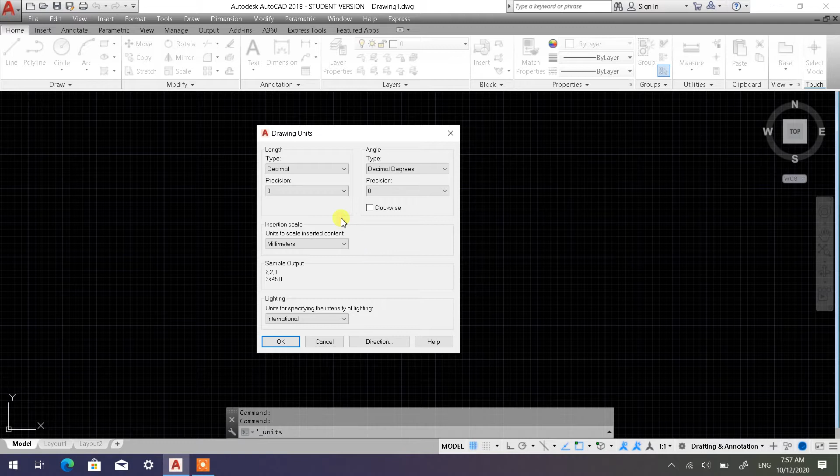Then I will pick AutoCAD ISO, as usual, AutoCAD ISO for metric units. Before I proceed, I need to check my units definitely. I'm going to make sure this is decimal... I'm going to pick without decimals, and everything should be okay. Then just click OK.

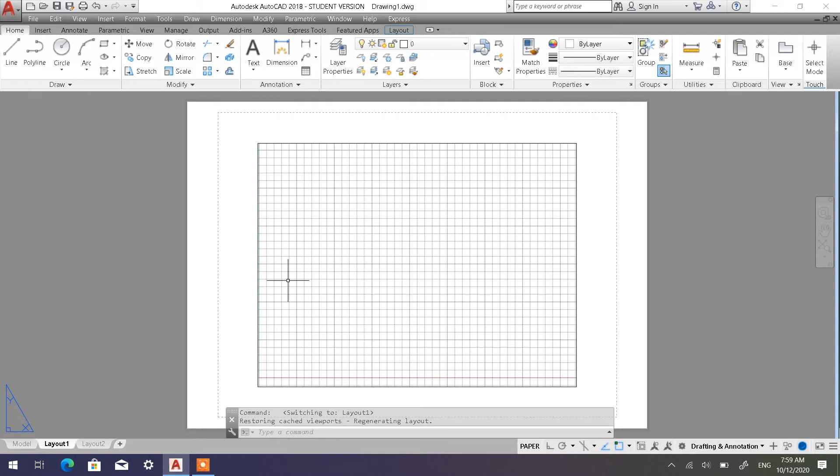So when you pick layout 1, it will form like this. So let's delete this first, just click this one and delete. Then we have to set up our layout for the title block.

What you need to do is bring your cursor to layout 1, right click, then go to page setup manager. You have to make sure you pick layout 1, not layout 2, because we want to set it on layout 1.

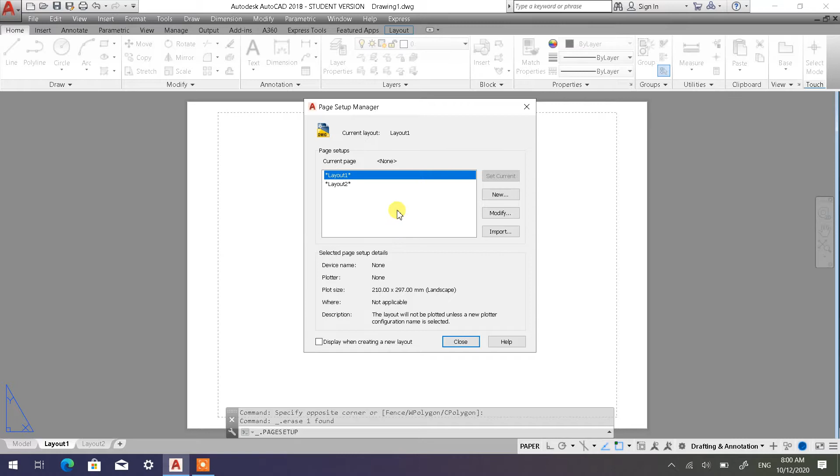So go to layout, since we already chose layout earlier. If you pick layout 2, you choose layout 2 instead. But in my case, as I mentioned, I picked layout 1, so I'm going to use my layout 1 to edit and manage the layout. Once you've picked layout 1, you go to modify.

If you look at the printer plotter section, if you expand this arrow, you can pick whichever type of printer you use. But let's say you don't have a printer, you can just simply go to DWG to PDF, drawing to PDF.pc3. You can choose this one.

In my case, I have two types of printers, HP DeskJet and also Fuji Xerox, so I can choose either one. But in this case, I want to show you, if I don't have a printer, for example, I can just simply pick DWG to PDF.pc3.

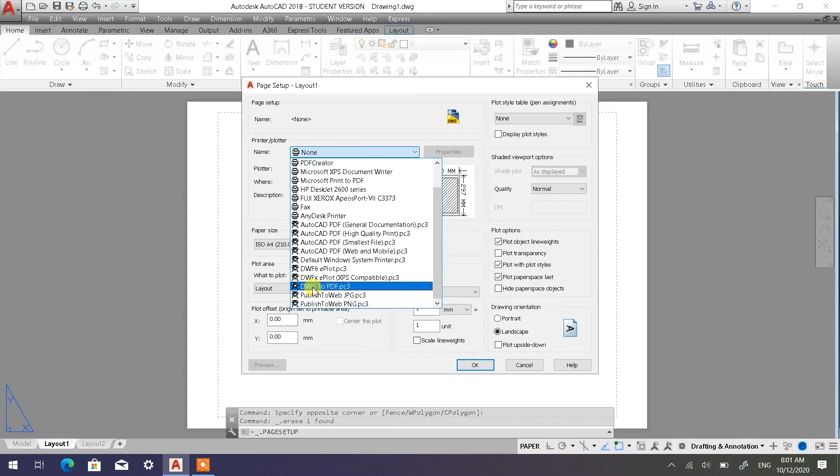Just click this one, and then you have to make sure you pick ISO. Not expand, not expand A4, but ISO A4. You can scroll this one.

ISO A4. This one, 210 times 297, this is for landscape. If you want to create portrait, you pick this one, 297 times 210. So let's say I'm going to create my landscape A4 landscape title block.

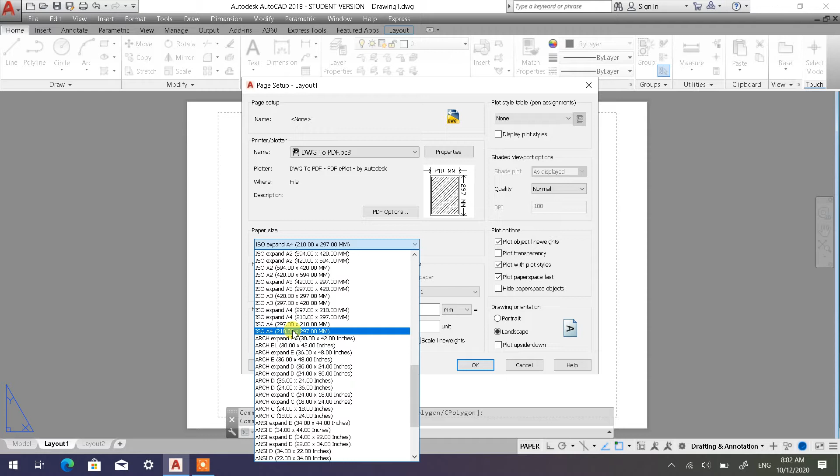So I'm going to pick, remember don't pick ISO expand. You need to pick ISO A4, 210 times 297. Just click this one. Then make sure all this, leave it as default. Layout, this one, scale 1 to 1.

And plot style table, I want to expand this and choose monochrome. Choosing monochrome means it will be black and white. If you want it to be colorful, you can go to AutoCAD.ctb or fill patterns. But since I want to make it black and white, I just pick monochrome.

And one more thing, before we exit from this page setup layout 1, I want you to go to the properties. Go to the properties button over here. Click this properties.

Under user defined paper sizes and calibration, choose modify. Pick this one, pick this one. Modify standard paper sizes, okay, click this one.

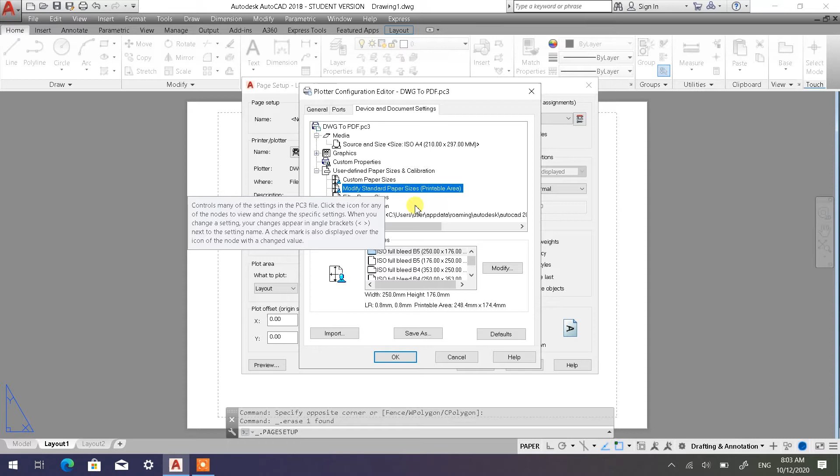After you click this one, go here, modify button. Click modify button and make sure all these you pick 5. Why? What is this 5 for? Top, bottom, left, right. Okay, later I will explain what all this means. Okay, 5mm for top, 5mm for bottom, left and right also we're going to set as 5mm.

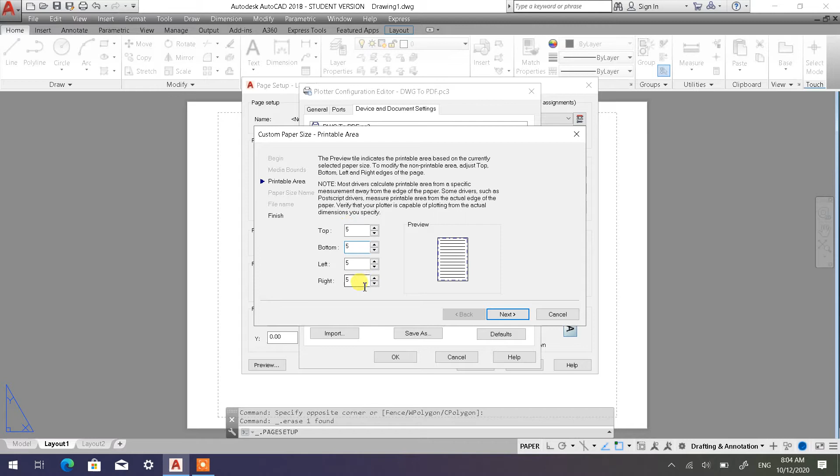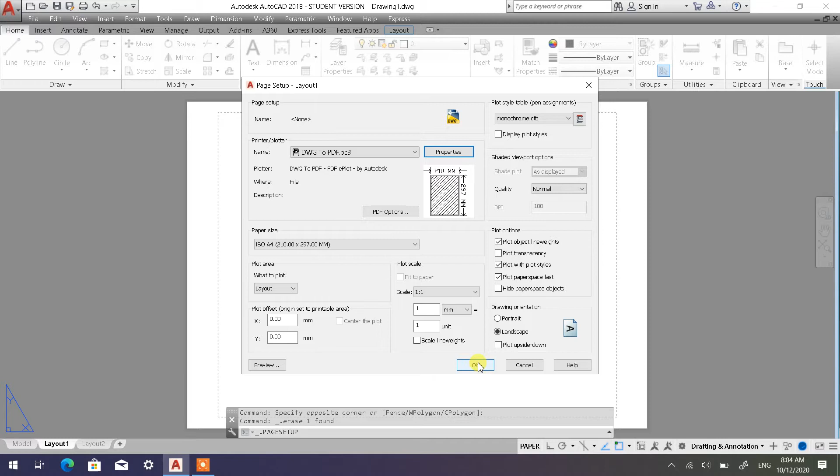Once you've changed all these or already set this value to 5mm, just go to next, and then next. If there's still next, then just finish it. Okay, just finish it. After you've set all this, just go to OK, and click OK. Okay, to exit from this page setup, click OK.

Then close. Now, the 5mm top, 5mm bottom, right and left that we set just now is from here. If you look at this dotted line, the outer one is actually the A4 size landscape. Okay, A4 landscape is 210. This one is 297, the length. Alright, the length is 297, the width is 210.

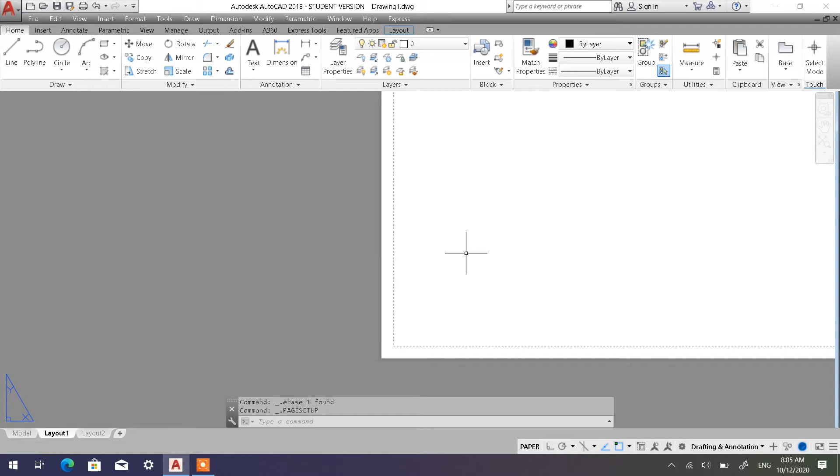Meanwhile this dotted line is our printable area. Okay, the area for us to print later. And the 5mm distance just now is from this dotted line to the edge of this A4 paper. So from here to here is 5mm, from here to here is 5mm. Okay, at the bottom, if I enlarge it, from here to here is 5mm, same as this one, from here to here is 5mm. Okay, I set it to 5mm.

You can set it to 10mm too, but if it's 10mm, the printable area becomes smaller. So that's why I just make it 5mm.

The reason I set it to 5mm is because I've tried 3mm before, and with my printer, the title block outer line doesn't print out. If I set it to 3mm or 4mm instead of 5mm, that outer line for the title block, which we'll draw later, doesn't print. So it comes out blank. That's why after trial and error I found that 5mm is the best for all the edges, top, bottom, right and left.

Okay, my printer can handle this. So it depends on the printer as well. If your printer, you try setting 5 first, then try 4. If 4 works too, okay, you can try to take the maximum possible for the A4 printable area.

Okay, now once we've created this, we want to draw the title block lines. So I want to create one layer. I don't want to use this default layer. You can use the default layer, but I don't want to. So I go to layer properties.

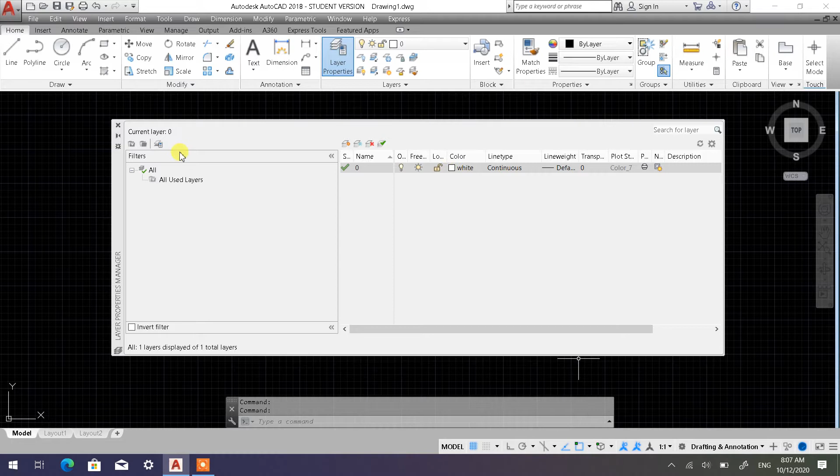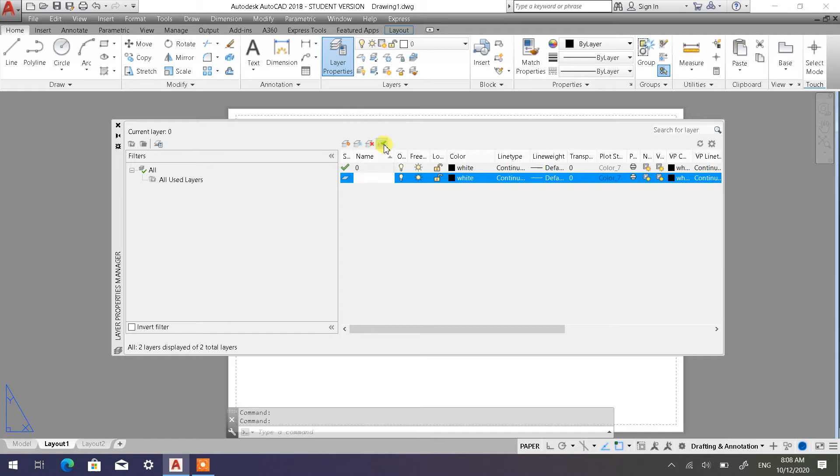Okay, so I'm going to create my layer properties. I'm going to create new, and rename it as TB. TB means title block. You can put any name, doesn't matter, no problem. I'm going to make it TB title block, which stands for title block, color white, line type continuous. I'm going to maintain all this. And then I'm going to make this one current. Alright, that's it.

Now I want you to go to rectangle, pick rectangle, and it asks specify first corner point. So bring your cursor, don't click exactly on top of this line, let it be slightly inside. Okay, let it be slightly inside, not too far in. Just estimate, okay, just estimate, then click, then bring your cursor, it asks specify other corner point.

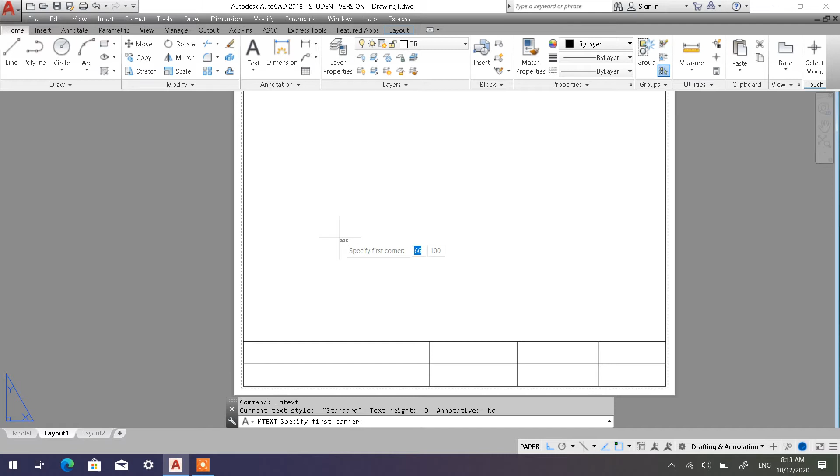I already showed you how to apply single line as well as multi-line text, but I much more prefer to use multi-line text. So go to multi-line text, then just click anywhere here, never mind, because later on we can modify it, so no need to worry. Click here, and then the second point is around here.

And then I'm going to type, don't worry about the size of the font, Faculty of Mechanical Engineering, enter, Universiti Teknikal Malaysia Melaka.

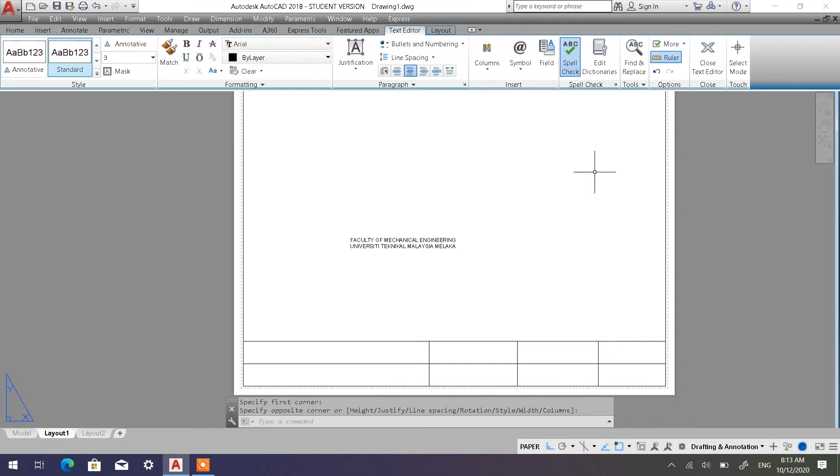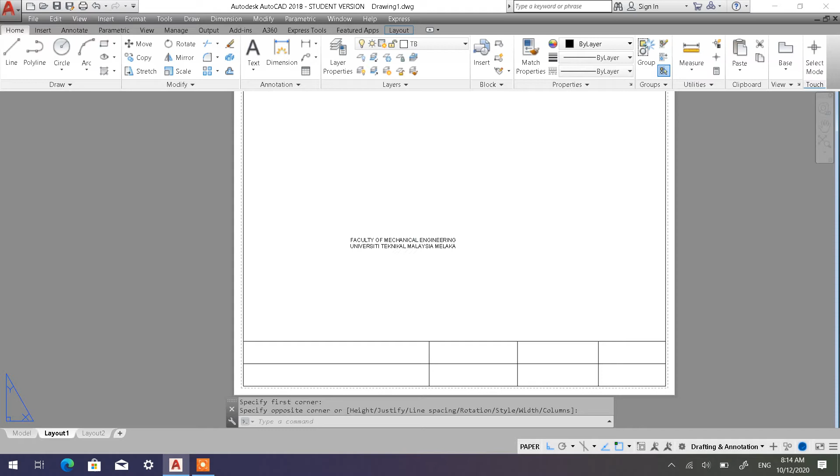This is small, so I would like to modify the font size. Double click, make sure you highlight all, then go to here, just click this one. Let's say I want it bigger, make it 4, enter.

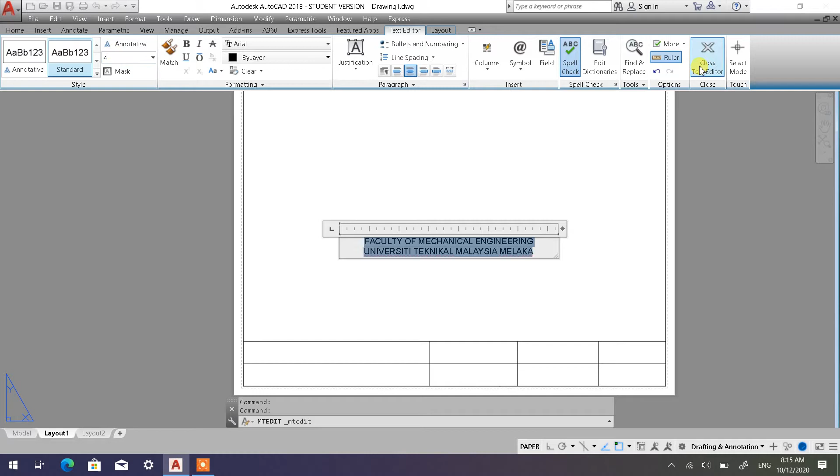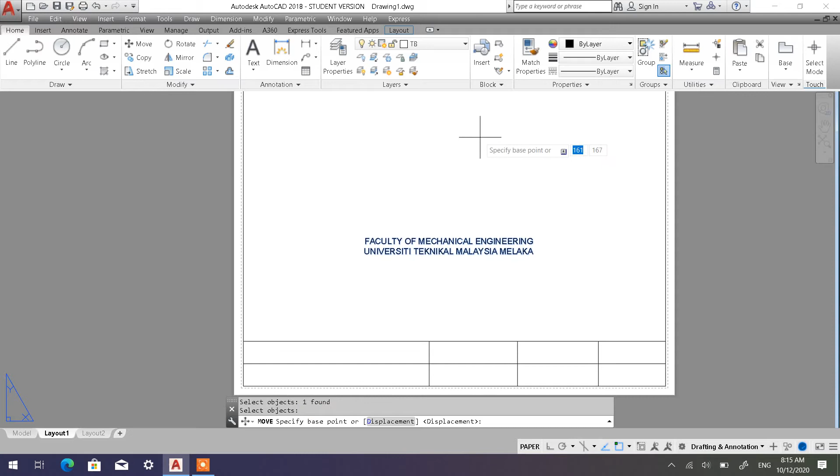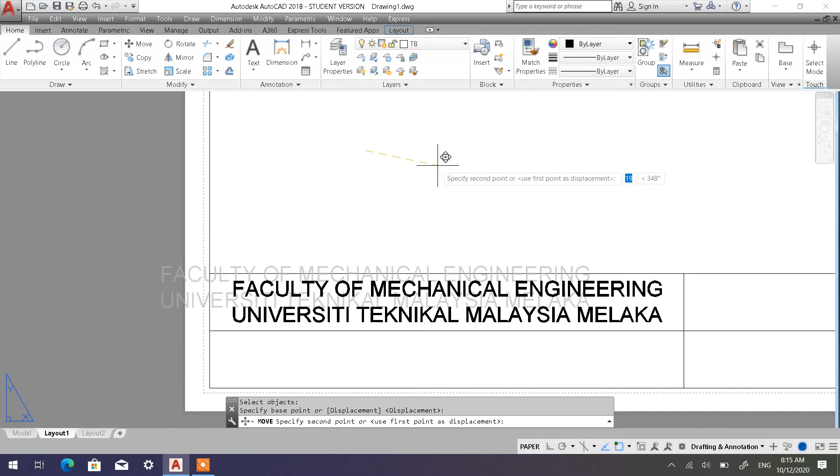Okay, just close editor, then move this text, enter, then click anywhere as your first base point. So just put it right there. Just nice, no need for a very accurate alignment, so that's it here, just nice. Click this one, move this, enter, and make it somewhere around here. Never mind, if anything we can adjust and modify its position later.

Alright, now I'm going to have a title block. So title name, drawing name, and also drawing title, and also drawing number. If you want the drawing title, it needs a longer or bigger space.

So I'm going to delete this one and move it a bit here. Move this one, enter. Let's say I want to move it, making sure my ortho is on. Move a bit to, let's say, around here. Okay, and then I'm going to create drawing title here, drawing number over here.

Okay, so I'm going to go to multi-line text, click here to here, and make it DWG. DWG is a short form for drawing title. I'd like to leave it as 3mm, its size is just nice.

Okay, just close editor, and then I'm going to move this one, enter, and I'm going to turn off my ortho so that I can have free movement, and locate it somewhere here.

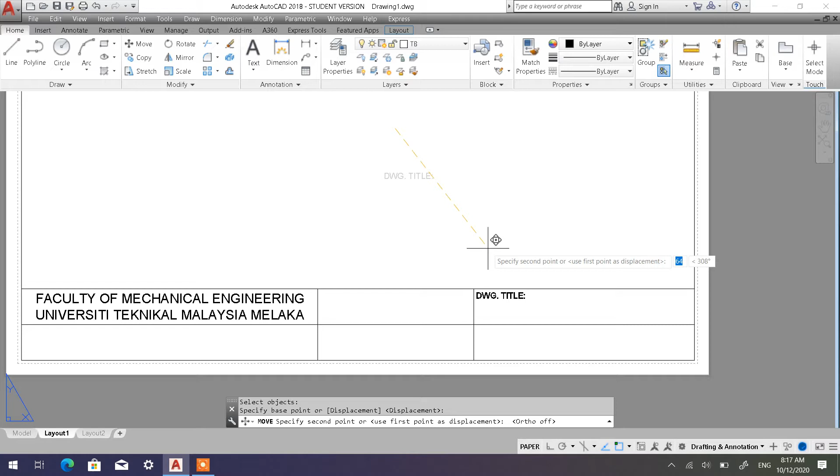Alright, and then I'm going to create the drawing number part over here. So I just copy this one because I'm going to use the same font size. Enter. So specify my first base point here, my second base point is here. Okay, escape.

Then I'm going to modify the wording. So go here and double click, then I'm going to make it drawing number. Okay, once confirmed, just click close, and then I'd like to create drawn by whom as well.

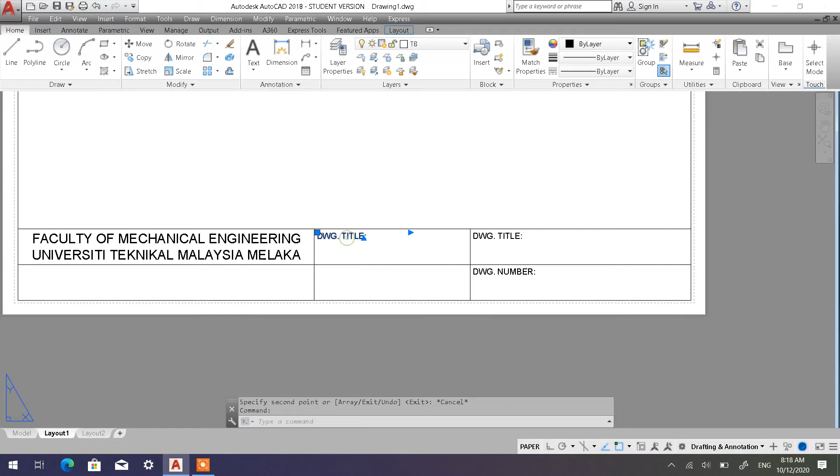In that case, I'm going to make it here. Drawn here is fine too, drawn by whom. Let's copy this one, enter, start from here and here, escape, then double click, and I'm going to change this to drawn by. So later on you can indicate your name over here, and then I'm going to have date, date also.

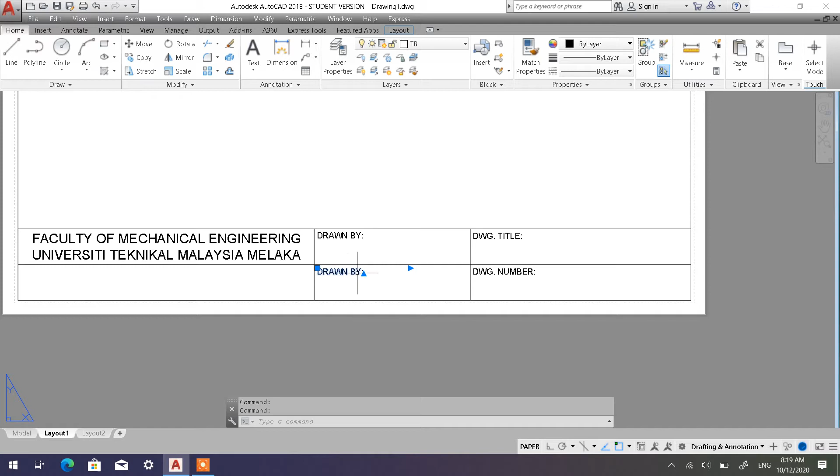Okay, I'm going to have something like this, drawn by, and date I'm going to put down here. So I'm going to copy here, click, enter. I'm going to start my first base point here, my second point is here, escape, and then double click because I'd like to change the wording. Okay, double click, then date. Okay, this you can make a bit smaller already.

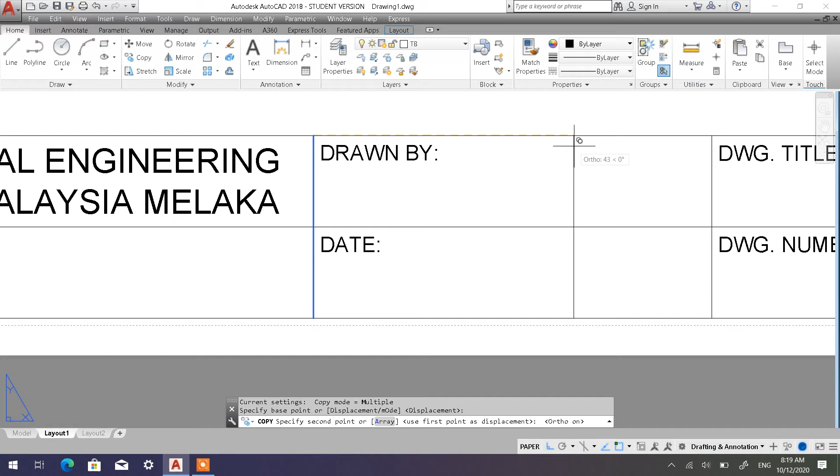Okay, and close. And of course scale, okay, scale and also the quantity. So I'm going to copy this line because I didn't make a border line here. Enter. So my first base point here and my second, I want to turn on my ortho, make sure it's on so it goes straight like this, so it doesn't go off. So probably somewhere around here, then escape.

Okay, now I'm going to copy this, enter, and this time I'm going to pick somewhere around here, and then just click anywhere since we can adjust this later here. Click here, and then double click, and let's say this one I want to make quantity. Okay, QTY, quantity. This I can make smaller.

Close editor. Okay, I move. Which object am I going to move? This object I'm going to move. Enter. Then you can click anywhere. But you have to make sure, if you want it straight like this, you have to make sure your ortho is on. Or else if your ortho is off, you can still play around with this one. So either way works.

But for my case, since I want it straight with this, I'll make sure my ortho is on. Okay, so just somewhere around here, then click, and then I'm going to copy this one, enter, from this base point to here, and I'm going to double click it to change it to the scale of the drawing later on. Okay, then close editor, and I'm going to center this one a bit.

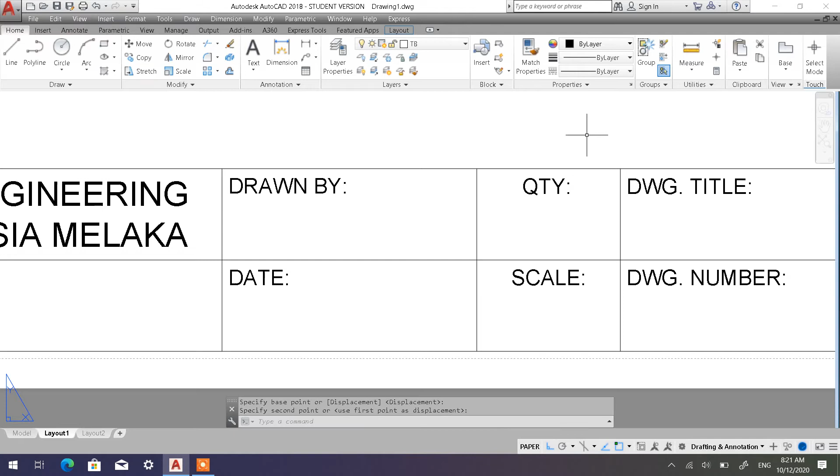So I'm going to move this, click, enter, and I just click anywhere, somewhere around here. Okay, there you are. Alright, we just left one more here, so probably we can create a title over here. I'm going to copy this one, the mechanical engineering one, enter.

My first base point to my second point, then escape. Then I'm going to change the wording, so go anywhere here, double click, and I'm going to indicate this one as BMCG 2513 section 3 group 1, let's say for example. BEKG, right? BEKG section 3 group 1.

Then just close your editor and you can adjust the position. So I'm going to move this object. Enter, and then just simply create somewhere around here.

Okay, kalau you nak buat SEM 1 2020-2021, maknanya you kena anjakkan ini sikit lah. You can create, never mind, put this one.

Okay, let's say you're going to put somewhere around here, and let's say I'm going to create one line from, make sure dia sama lah sikit lah, agak-agak je, tak perlu ni. Okay, click here and then to here, escape, and I'm going to copy this one.

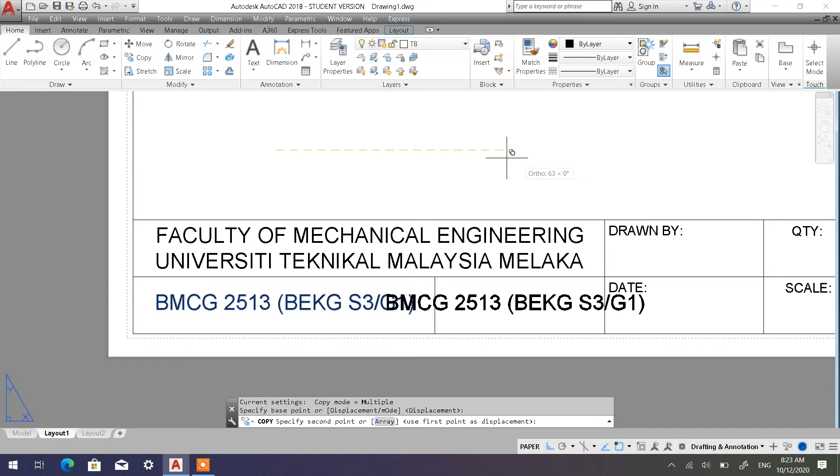Enter, and just pick anywhere. Okay, then escape, double click, and highlight all these.

Let's say SEM 1, session 2020/2021. Okay, so ni agak besar, so close, never mind, kita kecilkan dia, double click, highlight all first, then instead of 4, let's say try 3, kita try size 3 ni, enter.

I think this nice, then close, and I'm going to move this text, enter, and just pick anywhere here. Okay, katakan I nak ortho off so that I can play around with the movement. Let's see, kita letak tengah-tengah. Okay, just agak-agak ni lah. Okay, click this one. Okay, this nice.

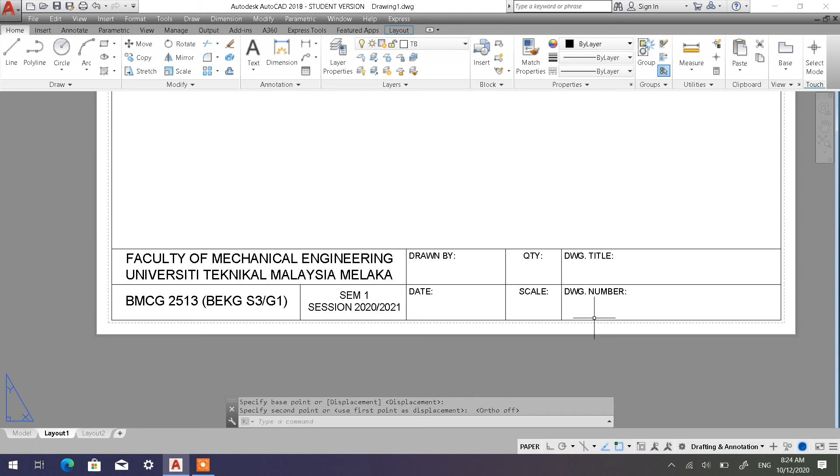Alright, so this is one of the example. You can create any information in your title area here. So however, this is one of the examples that I would like to show to you. So now, once after you already created all these, okay.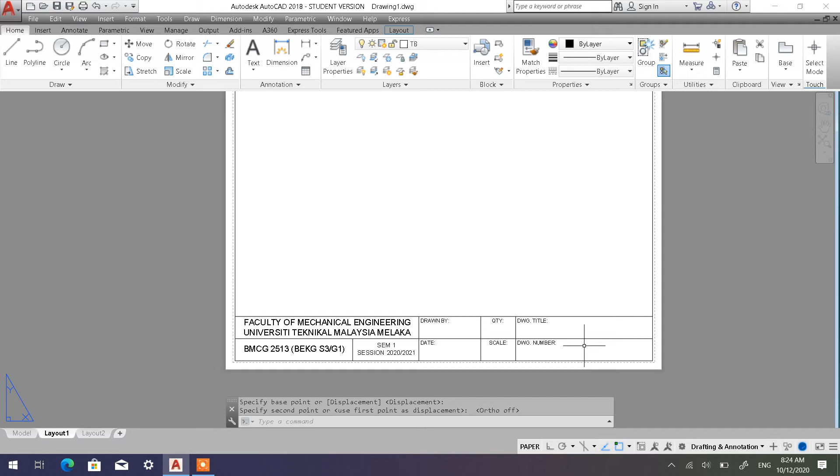So you need to block all these. Semua yang you dah buat ni, garisan-garisan dan juga semua wording yang you dah buat ni, kita kena blockkan dia supaya apa? Supaya dia tidak berubah, dia tidak bergerak. Okay, mana dia fix pada bahagian sini, di area yang telah kita setkan sebentar tadi ni.

So what you need to do now is that, okay, you type block, BL. Okay, bila you type BL saja, block ni dah keluar. Okay, so click this one, and then block definition dialog box ni akan terpapar, and you can rename it.

Let's say you would like to name it as, you boleh letak apa-apa nama pun. Katakan for my case, I nak letak A4 underscore landscape underscore TB title block. You boleh letak je, you nak letak nama you pun boleh. Okay, A4 landscape atau A4 landscape title block Jurie.

This one is my name. Alright, so you can put any name, should be no problem. Tapi dia tak boleh ada space bar. That's why I letakkan underscore ni, dia tak boleh ada space bar. Okay, so kalau you nak adakan space bar, you kena letak tanda underscore ni lah.

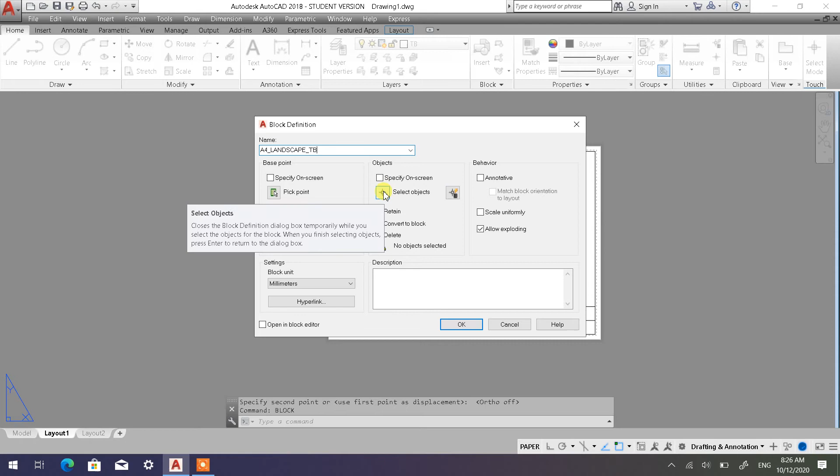Okay, now, bila you dah namakan title block you ni, so you go to here, object ni, go to select objects. Okay, dan klik semua ni sekali, pilih semua sekali, right? Klik and then press enter.

Kita ada 19 objek selected. So bermaksud ni lines ni campur dengan wording ni semua ada 19 objek. Semua sekali jumlah dia 19 objek. You have to make sure that block unit you mesti dalam milimeter. Okay, dalam milimeter. Okay, yang ni semua pun biarkan dia as a default.

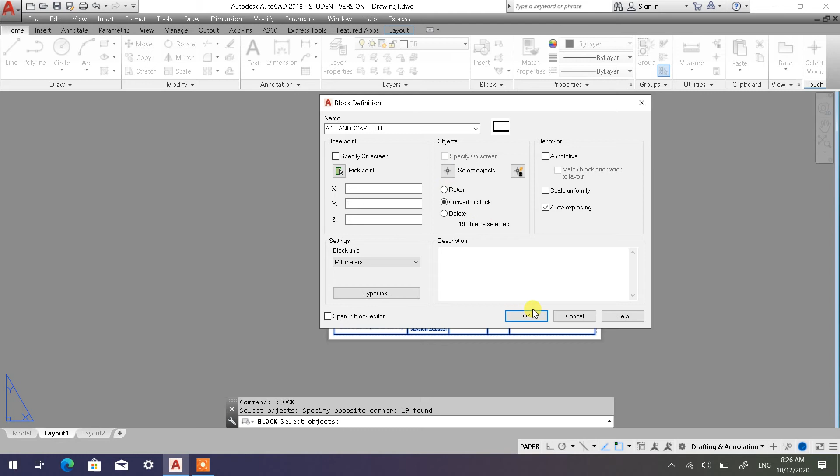Then once after confirm, then click OK. Alright, so now, kalau you bring your cursor, you klik je, nampak? Ini semua kita dah macam join kan ni lah. Tapi kita tak boleh gunakan join punya.

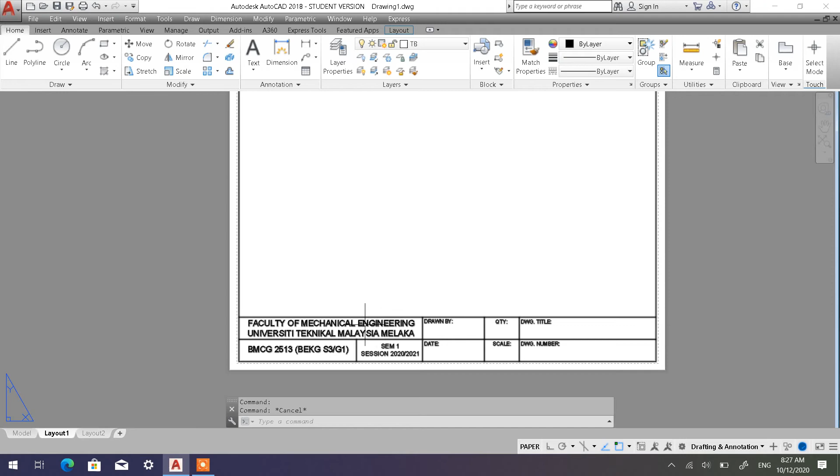Kita dah belajar sebelum ni kan, join punya command, this one. Okay, kita tak boleh guna join because join ni dia hanya boleh gunakan untuk line saja, tetapi kali ni kita nak joinkan line together with the wording. Yang mana wording ni dia tak bercantum kan, wording kita ni mana ada bercantum dengan line ni kan. Kan ada gap ni semua, ada gap.

So that's why kalau kita nak joinkan juga together with antara wording dan lain-lain ni, kita kena gunakan block tadi, block, block. Alright, so now I nak create kat sini, nanti senang kita double click je nanti kita boleh ni.

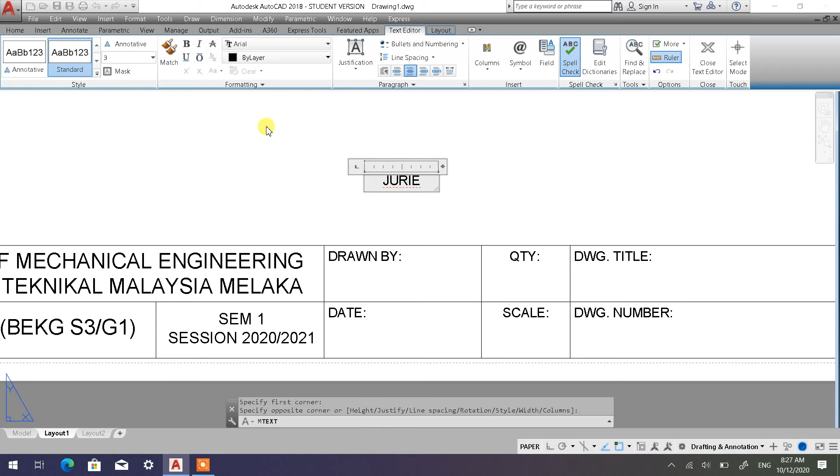So I just click just text multi-line drawn by, let's say I letak nama I dulu, okay, Jurie, Jurie, Jurie, okay, buat kat tengah, justify dia kat tengah, dan let's say 3, I think should be fine, 3, then click close, and then I'm going to move to here.